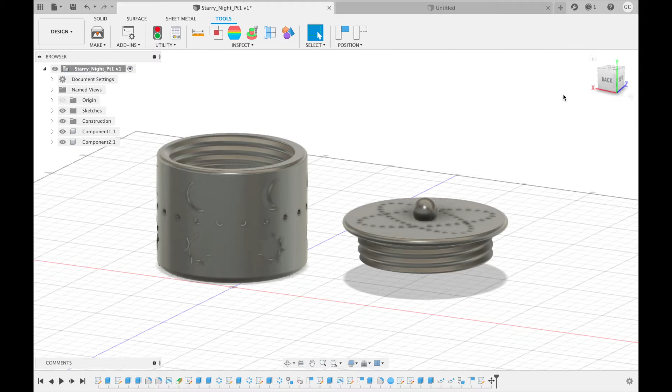Hey guys, so today we're going to be learning how to make this container right here. It has a screw on top and then it has patterns of the sun, moon, and stars on it.

Okay, so the first thing we're going to do is we're going to create a sketch of a circle with a 10 centimeter diameter, so 5 centimeter radius. Then we're going to select this and extrude 1/2 centimeter.

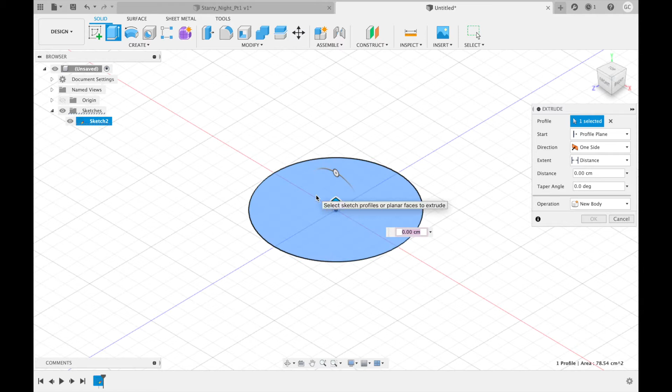So the next thing we're going to do is we're going to create another sketch, this time on the plane that we already created. We're going to create 2 circles this time. One, the same diameter as before, and one 9 centimeter diameter. Now we're going to finish sketch again.

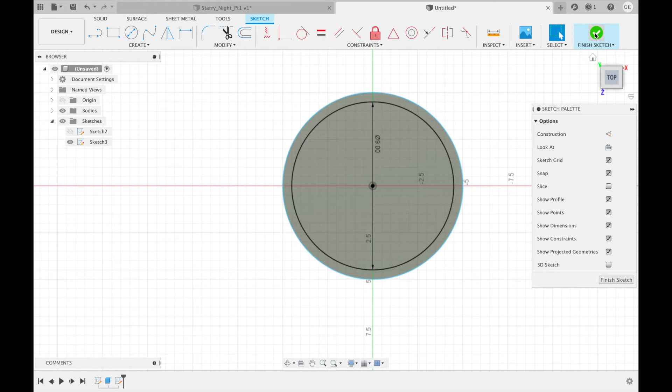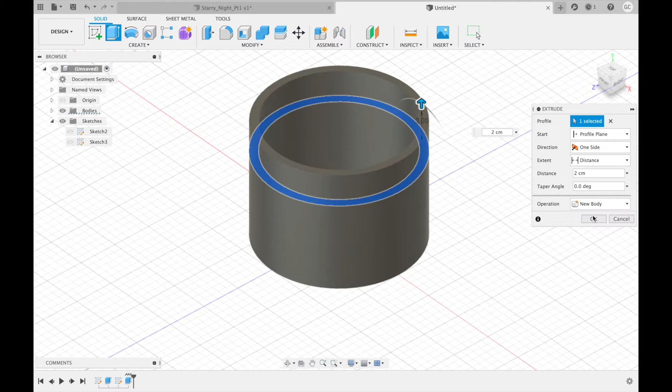Next, we're going to select the ring right here, then go to extrude again. This time we're going to extrude for 5 centimeters. The next thing we're going to do is, it's going to look repetitive, but there's a reason for this. We're going to click on this ring again, extrude for 2 centimeters. But instead of the operation being join, we're going to create a new body. This is what it should look like at this point.

To make this look nicer, we're going to create a fillet on the bottom edge. So select this edge, go to fillet. Let's put it at 0.5 centimeters. Okay. So you can see now there's a nice curve on the bottom.

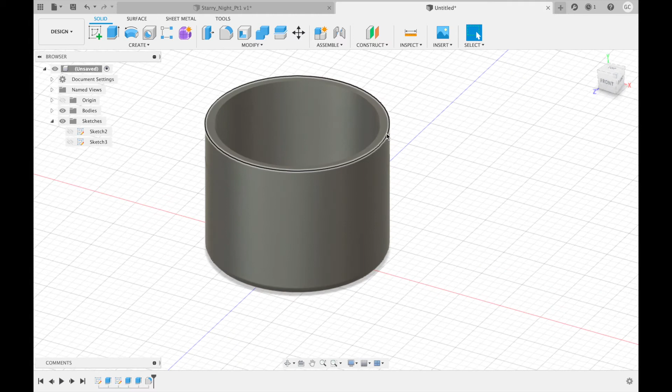We're also going to do the same thing for this top edge right here. So select the edge, click fillet. This time we're just going to do 0.25 centimeters because we have to do something on the inner edge as well.

Next, we are going to create a thread for the screw on top. So the way you're going to do this, go to create, select thread. It'll ask you to select a face, so we're going to select this one right here. We're not going to worry much about the thread type size, designation, class, or direction. Those are for more complicated things when you're trying to design nuts and bolts, etc.

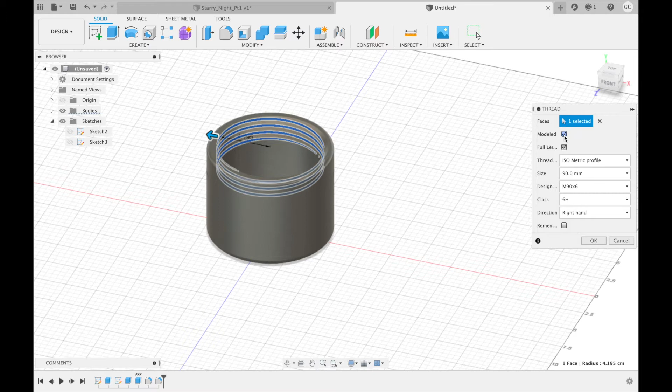What we are going to do, however, is we're going to click modeled. This just means that you will be able to see the thread in the model. And here you have it.

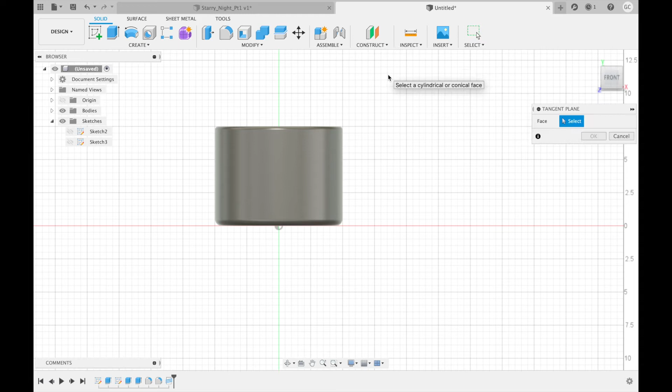The next thing we're going to do is create the sun, moon, and circle patterns that you saw on the finished product. The first thing we're going to do is click on the front view right here, then go to construct and select tangent plane. It'll ask you to select a face. You're going to select this cylinder right here, so click on that and click OK. As you can see, this plane is tangent to the cylinder.

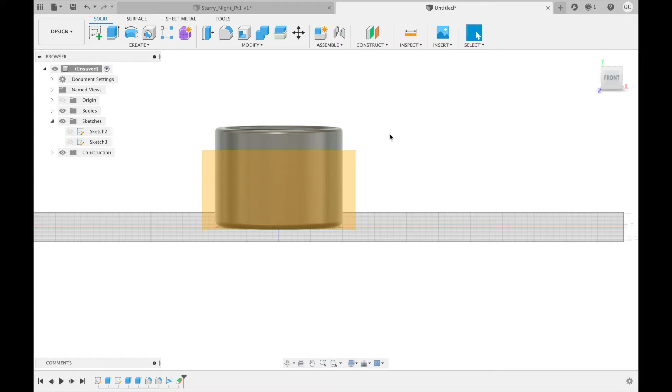Now we're going to use this plane we created to create a sketch. The first sketch we're going to create is the sun at the bottom. So to do this, click Create Sketch, then click on the plane. So the first thing we're going to do is to create a 1.5 centimeter diameter circle.

Next, we're going to take the line tool right here, go about 3.5 of these small blocks above. Doesn't really matter. If you want the rays of your sun to look different, then you can use different lengths. So you're going to go about here and then drag down to 2 blocks out. Then you're going to click here and drag down.

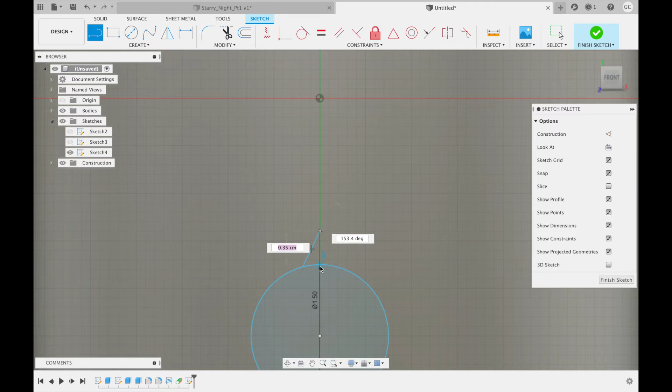The reason we created this line is to use the mirror tool, which we'll be using right now. To do that, go to the Create menu, go down to Mirror. It will ask you to select an object to mirror, click this line, and then it'll ask you to select a mirror line. We will use this line. As you see, this original line is now mirrored on the other side. There you have it. Now, we don't need this line anymore, so we're just going to go in and delete it.

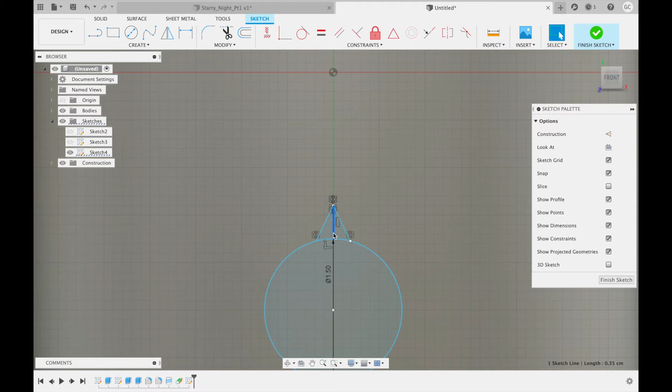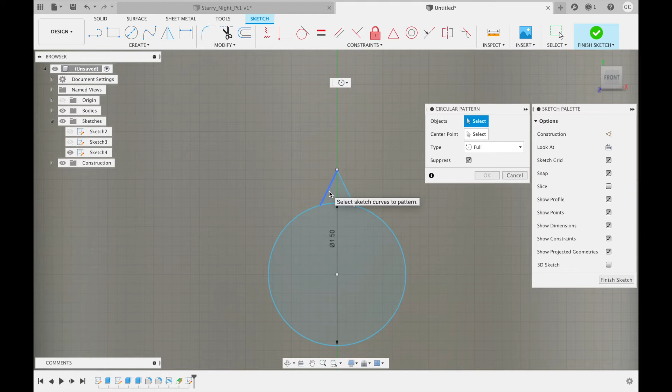So obviously, suns have more than one ray, but you don't want to have to copy-paste them all around, so we're going to use the pattern tool to do that for you. To do this, go up to the Create menu and select Circular Pattern. Then it'll ask you to select objects for the pattern. You're going to click these 2 lines. Then it'll ask you to select a center point, and you will select the center of the circle.

The type right here will determine whether it's a full 360 degrees you're rotating around, or you can set it to an angle or symmetrically off of the first point. We're going to use 360 degrees because that's what we're working with. The suppress right here means that you can unselect as many of these as you want, and those will not show up on the final pattern. We want all of our rays to show up, so we'll unclick the suppress.

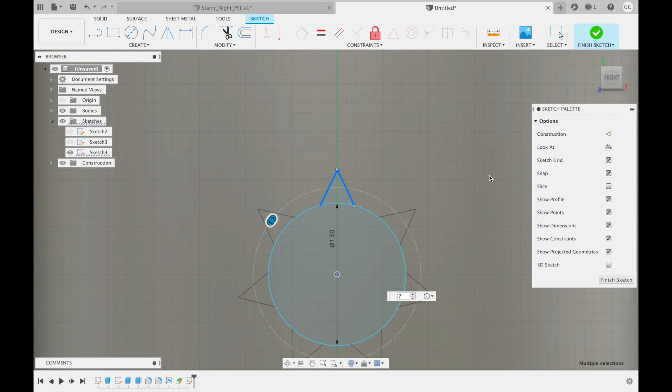Next, we'll go down here. Notice how this says 3, which means that the 2 lines we had earlier will only be copied 3 times. Let's put it up to 7. Here's our finished sketch, so we're going to go and finish the sketch.

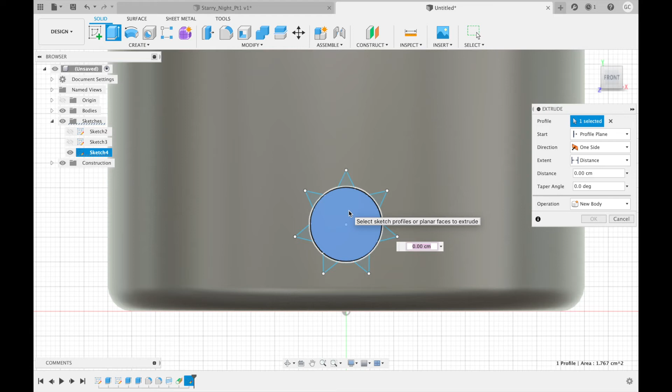The next thing we're going to do is imprint this pattern onto the container itself. To do this, go up to Extrude. Let's start with the center profile right here. Click on that, and for distance, we're actually going to do a negative number. So we're going to go negative 0.25 centimeters. You'll see the operation defaults to cut, which means that it will be taking away material like we want it to.

Now we need to do a similar thing for the sun's rays. You may notice that you can't see them anymore. That is because the sketch is hidden. If you go over to the menu on the left, you can press the eye with a line through it, and it will show you the sketch again.

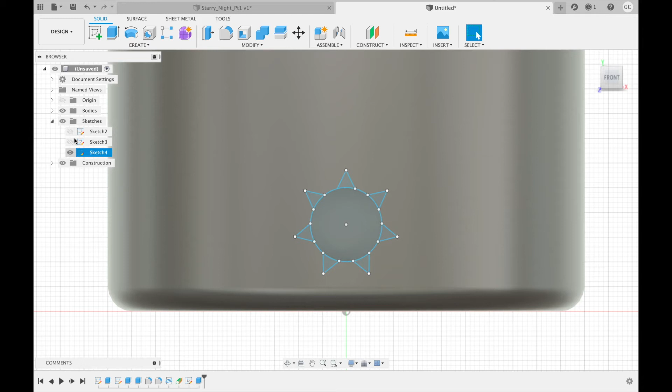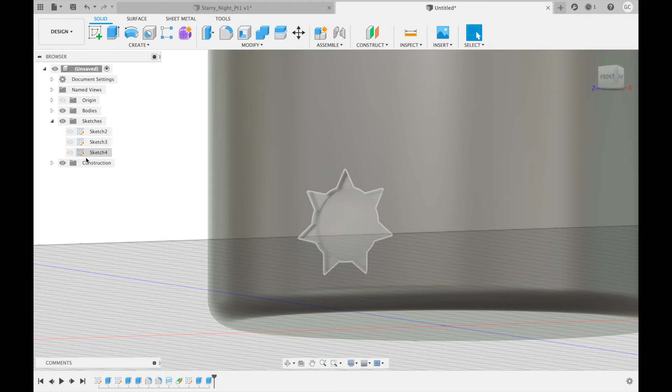So, we'll go to Extrude again. It says select profiles. Select all of these rays. And for distance, we're going to do negative 0.2 centimeters. Again, it's going to be operation cut. Press OK. If you hide the sketch over here, you will be able to see that the center is deeper than the rays of the sun, so you'll be able to see the difference between them more clearly.

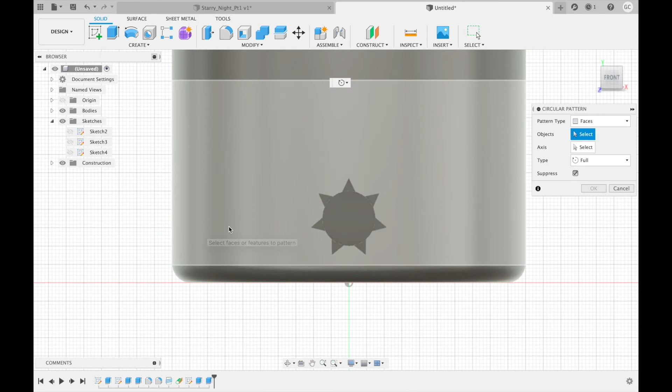Next, we'll be using the pattern tool again to copy this design 5 more times. To do this, go up to Create. Now we have to go down to Pattern, and we're going to select Circular Pattern again. Go up to Pattern Type. It's important to note that this tool is very powerful. It can copy faces, bodies, features, and components. We're going to select features because we used an extrude command.

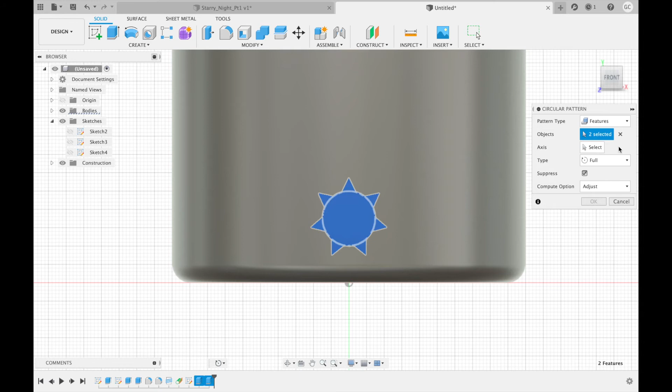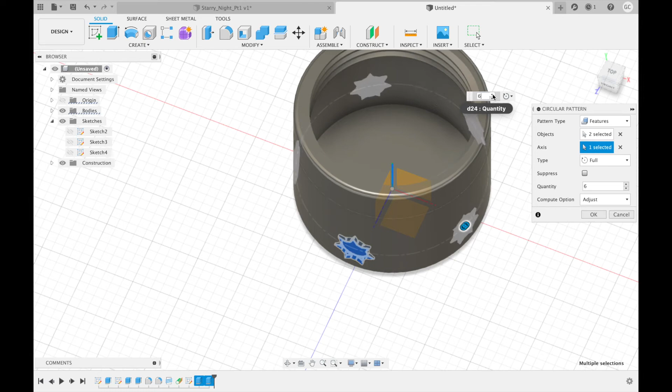Next, it'll ask you to select objects. We're going to go down to the timeline and select both extrude commands we just did. Next, it'll ask you to select the axis to rotate about. Since we centered this on the origin, we can click on the y-axis. We don't want any of them suppressed, so we'll unclick that, and then there will be 6 around the circumference of the container total, so we will put this at 6. As you can see, now there are suns all around the circumference of this cylinder.

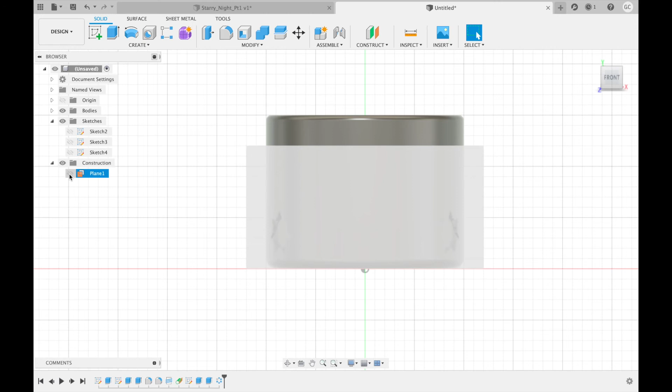Next, we're going to create the circle of lines we saw earlier. If you go back to the front, then go on Construction, you will see that you can view the plane that we created earlier that's tangent to the cylinder. We're going to create another sketch this time on this plane.

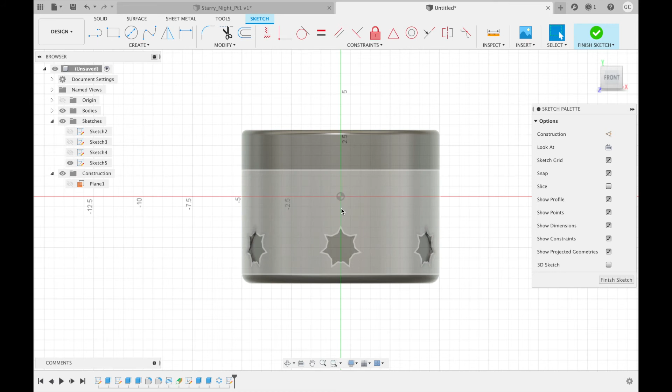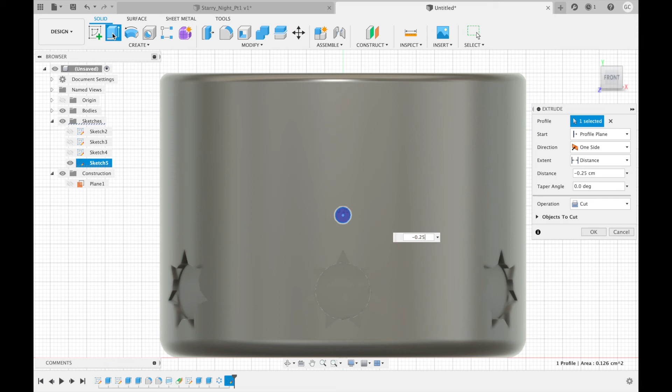Unfortunately, it's a little difficult to find the center of the cylinder given that it is 2 separate bodies, and so therefore it will not automatically find the center. But if you look at the grid, you can find something that is reasonably close. So it looks like it's going to be right about there. We're going to create a circle with a center right there and a diameter of 0.4 centimeters. Next, we're going to select this circle, extrude, and extrude negative 0.25 centimeters. Again, the operation will be cut.

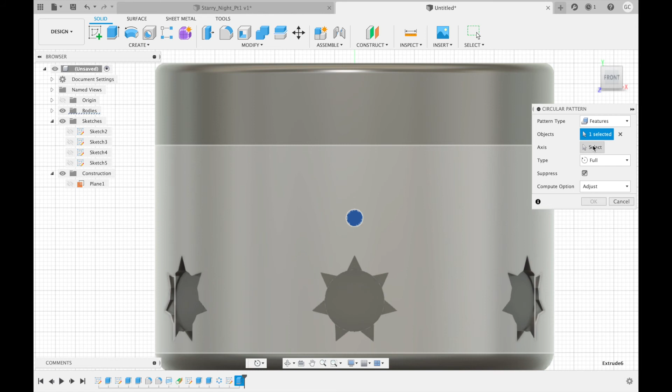We will be using the pattern tool again, so go up to Create, Pattern, Circular Pattern. The pattern type is already on Features, so when it says Objects to select, go down to the timeline and select your extrude command you just executed. Then for axis, we are still centered along the origin, so we're going to go and select the Y axis. Unclick Suppress, then put 20 into the number.

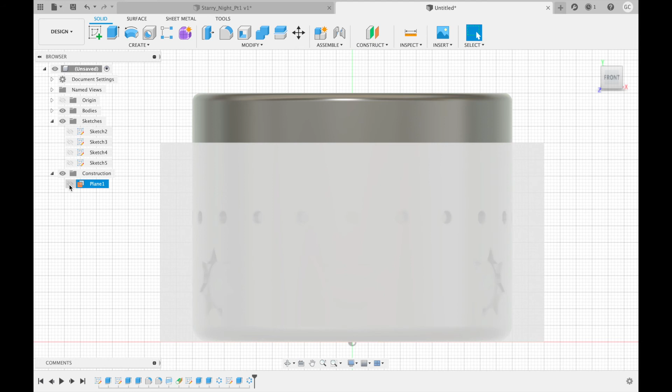For our final pattern on the main part of the container, we're going to create a moon. To do this, we have to create one more final sketch. So go and show the plane, create a sketch, select this plane as your work surface. First, we're going to go up to Create, Arc, and 3-point arc. And we're going to create our arc starting about 0.4 centimeters above the red axis and 0.6 to the right of the green axis. We're going to create our line to be 2 centimeters high, then pull out to approximately right here.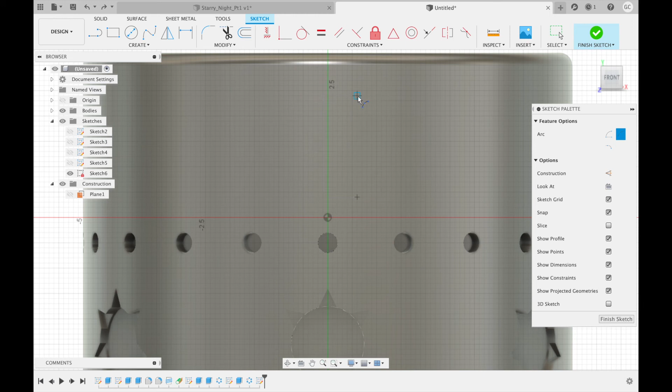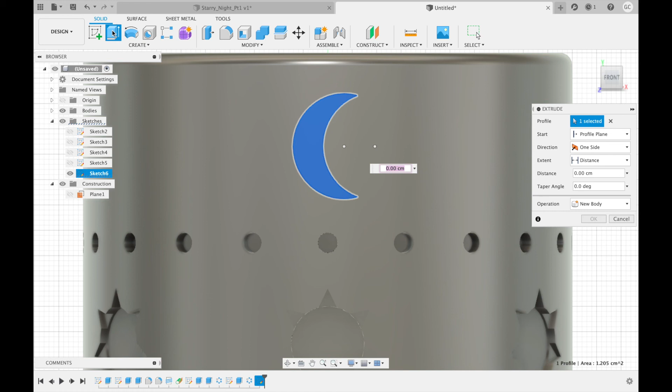Next, we're going to create a second arc, a 3-point arc again, with the same starting and ending points. However, don't pull it out quite as far. Then click Finish Sketch. Then you're going to go up to Extrude. It automatically selects the moon as your profile. So you're just going to type in -0.25.

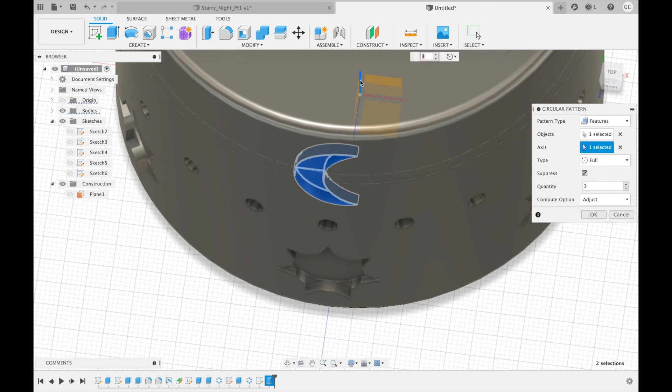And for the final time on this part of the project, we're going to go up to Create, Pattern, Circular Pattern. For objects, you're going to select your Extrude command, and for the axis, your y-axis. There should be, again, 3, no suppression, press OK. And this is your finished body of your container.

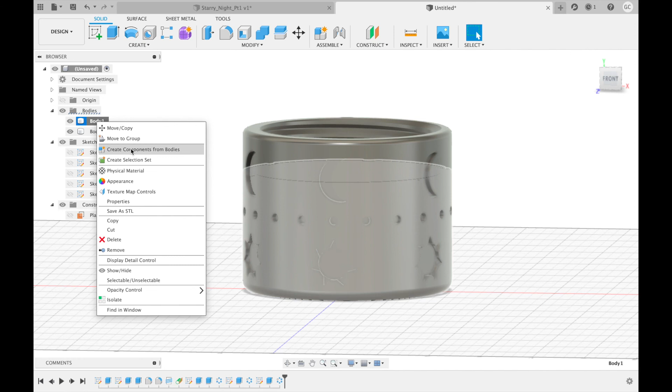Because we have to create another part, we're going to turn this into a component so we can move it around. Because we haven't created a component yet, we're going to go over to Bodies. There are 2 bodies, and we're going to Control-click and select Create Components from Bodies. As you can see now, this bottom bit is a new component. However, we want the second body to also be part of this component, so we're just going to click and drag into this. Now both of these bodies are within the component we just created, and we can now move this around. Let's move this away from the origin so we will be ready to create the lid in our next video.